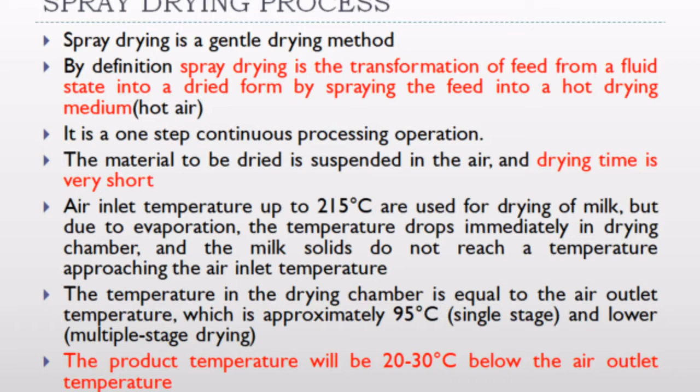Okay, the principle. In spray drying, what we are doing is spraying the milk, concentrated milk, into very minute droplets using an atomizer. The equipment or the part of dryer that is used to produce very minute sprays or a fog-like mist is called atomizer. So the basic principle consists in atomizing the milk, preferably preheated and concentrated milk, to form a spray

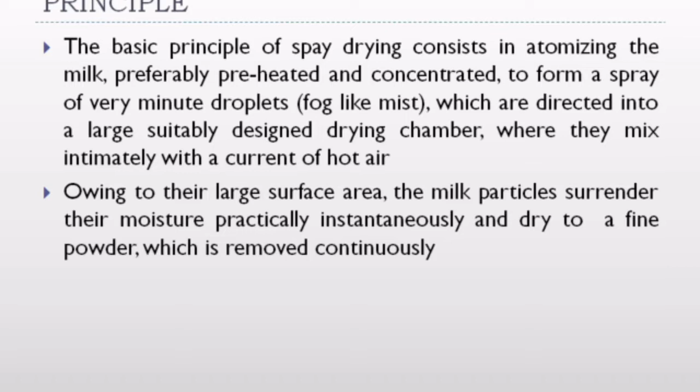of very minute droplets which are directed into a large drying chamber where they mix intimately with current of hot air. So when you produce very small droplets, the surface area increases. So due to the large surface area, the milk particles surrender their moisture practically instantaneously and dry to a fine powder which can be removed continuously.

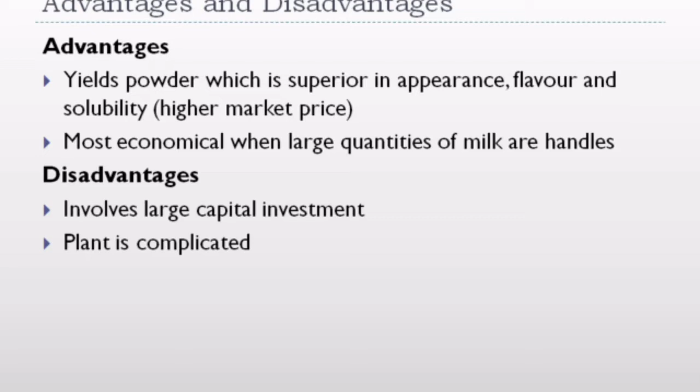Now you see the advantages and disadvantages. Advantages: it yields powder which is superior in appearance, flavor and solubility, so that we will get a higher market price. It is more economical when large quantities of milk are handled. And disadvantages include: it involves large plant and capital investment, and the plant is very complicated.

Meanwhile, air will be filtered and heated by some of the indirect methods, and it is also supplied into the drying chamber, and instantaneously, within 2 to 3 seconds, the moisture from the milk droplets will be removed and the powder will fall by gravity into the bottom of the drying chamber and it can be removed from the bottom.

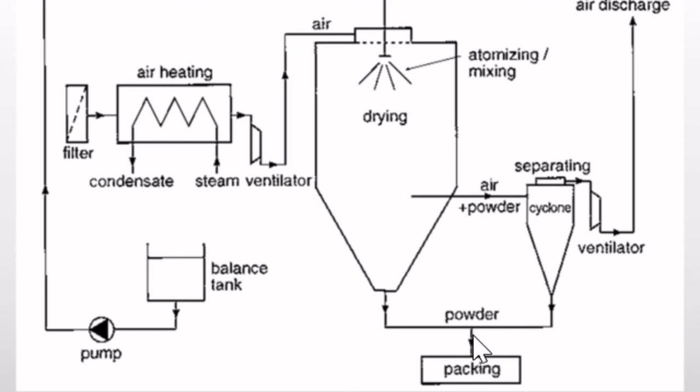Here you will have a rotary valve, but very fine powders will escape with exhaust air. So you will have to remove or separate these powder particles from this air. For that, different powder separation equipments are there. One of them is a cyclone separator, and air will be exhausted into the atmosphere and powder will be packed. It will be conveyed using some pneumatic mechanism.

So air through a filter is heated and air is dispersed into the drying chamber. Same time, milk or concentrate using an adjustable pump through an atomizer will be supplied to the drying chamber, and from the drying chamber you will get a dried product, and from the cyclone also you will get a dried product, and air will be exhausted through the hood.

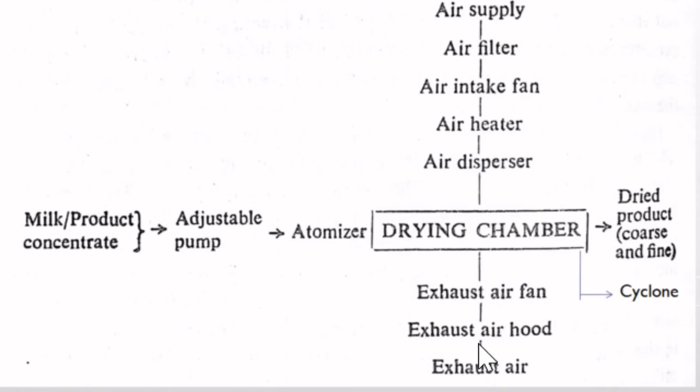So these are the characteristics of spray dryers. It's a continuous operation. Very little labor is required for operating a plant. Then it can handle many different products. Heat contact to product is short during drying. Thermal efficiency is low compared to other types of dryers. And operation is dependent on large surface area, which depends on the type of atomizer. Then separation of air and product after drying is very important.

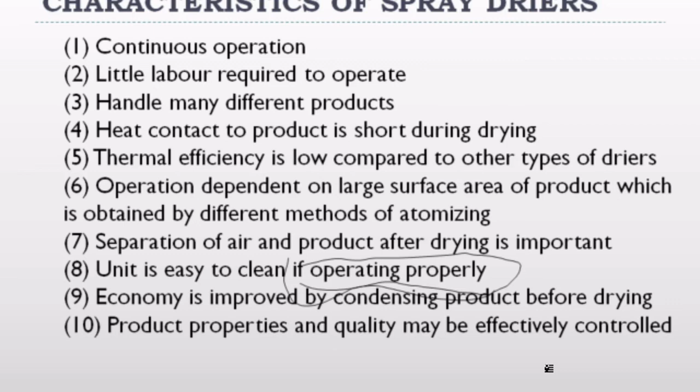Unit is easy to clean if operated properly. If it is not operated properly, it is very difficult to clean. You have to keep in mind. Then economy is improved by condensing the product before drying, that we have already seen. Product properties and quality may be effectively controlled. So these are the 10 characteristics of spray dryer.

Now different parts of spray dryer. We have seen drying chamber, air heating and air distribution system is there. There is a feed system, there is an atomizer, then powder separator. These three things are considered key parts. These are very important in deciding the product quality, processing conditions, everything.

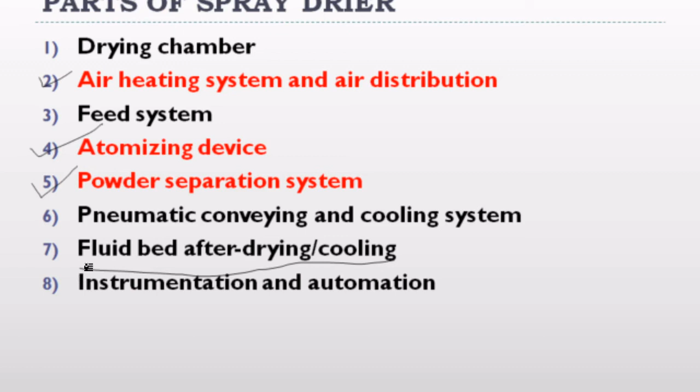Then you have a pneumatic conveying and cooling system, fluid bed. It is used after drying and cooling. Then instrumentation and automation. So these are the different parts of spray dryer, which we'll learn in detail in coming classes.